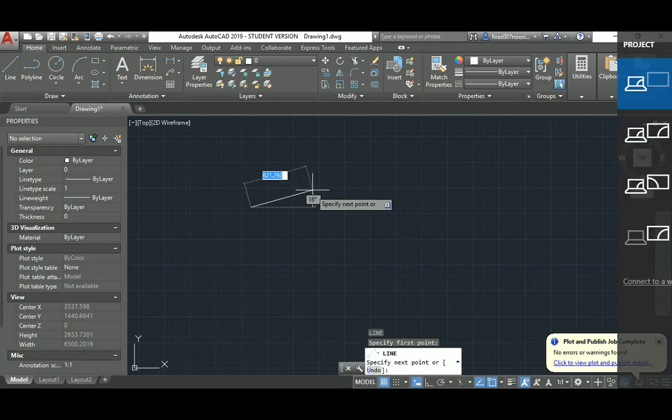So I'll go ahead and draw a line, double check that I have F8 activated, which technically corresponds to the Ortho function key, and have a 50 value active. Zoom in to see the 50 properly as a value, then draw the square as I just did.

Go ahead and draw the thing here, which is 100, and then go back with 125. So I'm going to go from the middle, going back to 100, then 50 down, then 125, and then just close the geometry.

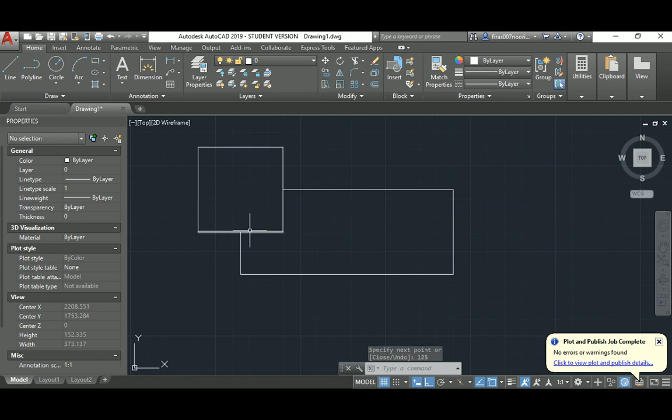The next step is again straightforward. You're going to offset to 20 and have this 40 by 40 shape. So you're going to throw a line here at 20, then go down 40, and continue with 40s to close the geometry.

Maybe you need to get rid of this one. Now another 40 here, and it's just in the middle since it hasn't been provided, so I'll assume it's in the middle. I'm going to take this one here and just close the line.

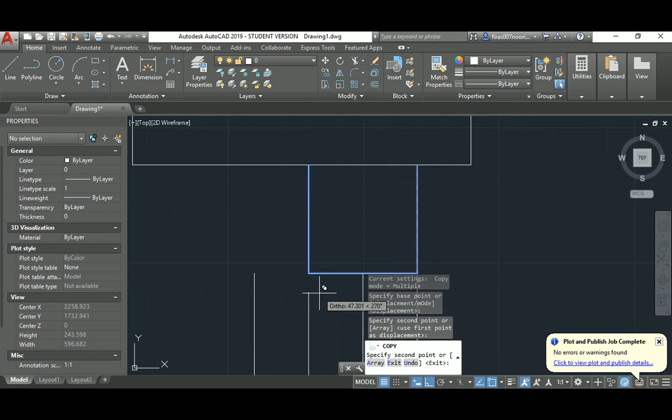Now there is a quadrant of a circle. So all I'm going to do is take this as the center and that end as the end of the radius. I'll select those two lines and trim to get rid of this, keeping this quadrant by itself. Now technically we're almost there.

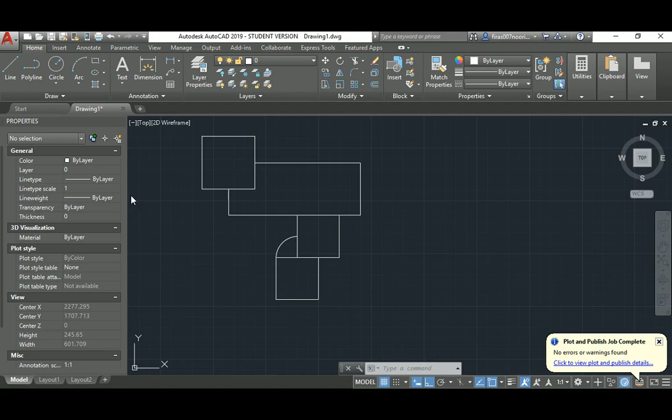We have a quadrant here and a half circle, so the same technique will be used from the intersection to the edge, and then trim this one with this one, hit space, and remove. I think I have to remove this one also.

This one is actually a circle rather than an arc, and probably this one is an arc, and the rest of them are circles. Again, I don't care as long as the radius is given, it's just from the start to this point.

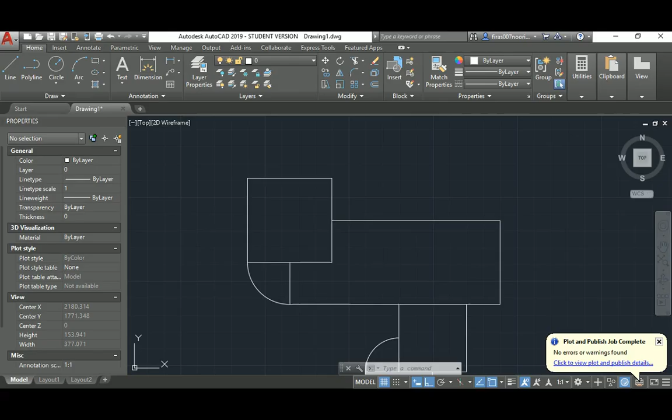So I'm going to assume I can stand in the middle and go up, then trim the rest of whatever you don't need, and delete this vertical line. What else do you believe that we need to do?

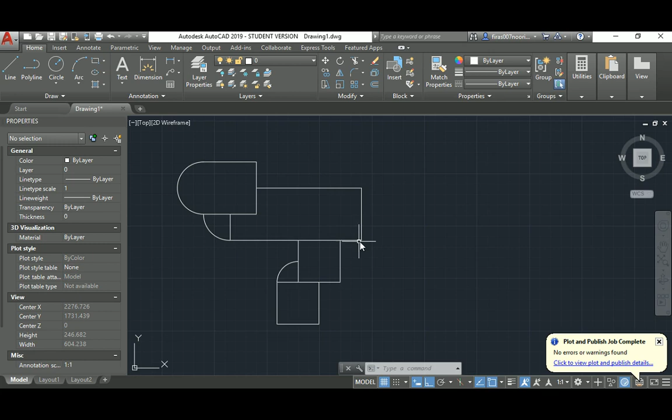You can't do this properly because you don't know how to draw the arc, so you need to go here, which is in the middle, 50, and then go perpendicular 100. That's the middle of this. You go 50, and then up 100, and that is basically the mirror axis.

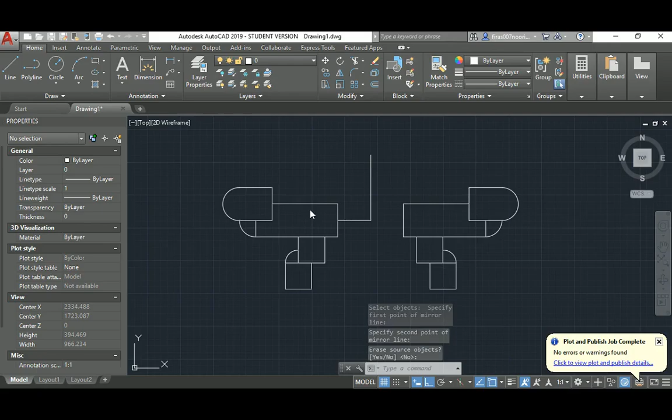So you can go ahead and mirror all this based on this line. That's what we actually need. Again, that has to be extended, this to be in the middle, and that to be from the edge. So this to be extended again, and I think a line from the middle and a line from the end, if I am not wrong, from the end and here from the middle.

So what we have here now, we understand that this is the midpoint of an arc, so that means this is the mid again. And as long as I agreed in the lecture, if I don't provide the dimension here, where that point ended, it means the middle of this 50, so that's 1, 2, and 3.

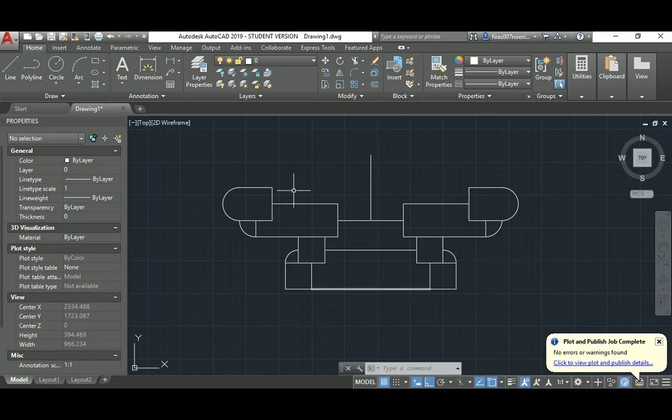The rest, as you can see, is similar to that part, obviously a mirror, and then we get a different relationship by just trimming instead of keeping the line as I did here. So simply I will go space, which is arc by 3 point, from the middle to the end of this line and then to the middle of this.

That's my arc. Now I can go ahead and draw 30 and then go up and then 20 and then go up. So I'm going to go to the corner and push forward to the left and go 30, extend that line perpendicular, I don't care where it ends, offset it to 20.

I would highly recommend to mirror that and then trim double space and get rid of all those extra lines, as you can see.

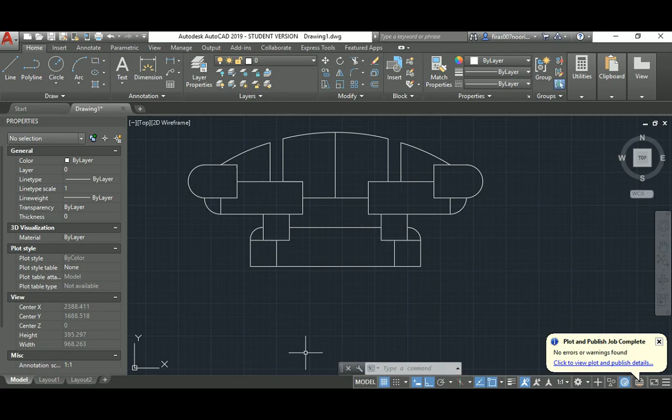What else? This one, the same, you just need to define the maximum depth of it, which is 50 from the middle, so I stand up in the middle and give it a 50, and again arc by 3 points, so that's the middle point, which is the start, that's the second point, and that's the third point. There is no line technically here, so you have to remove this one.

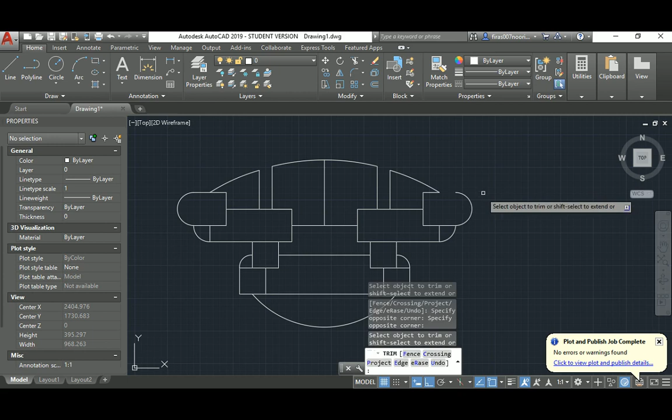The remaining is just to trim, so I'm going to get rid of everything outside that. Probably this one to be deleted, that deleted, and again this one trimmed. What else? All those trimmed, so this one and this one, and I think that's it, guys.

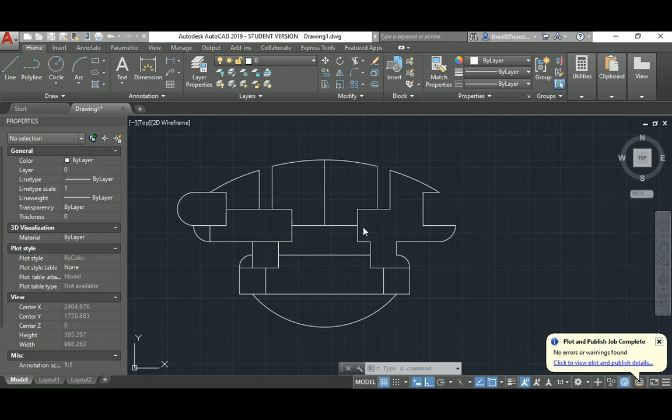The rest is you just need to add dimensions, so DLI, and you can go ahead and add 2 clicks for the beginning and the end. It's just straightforward, guys. I'm not going to add the dimension for all the shape.

I bet that very quick video might help you understand how to solve such a quiz, and it's very basic and easy, to understand how to depend on mirror, to trim, to understand that this is a circle, and I did not provide dimensions, so you have to understand that you stand up from the corner and end up to the edge, and understand that this is a 3-point arc, same as the one here, and the geometry later on, if you see such cases, you understand that they have to be mirrored, and then maybe the only difference is just to trim the inside while the left side is kept.